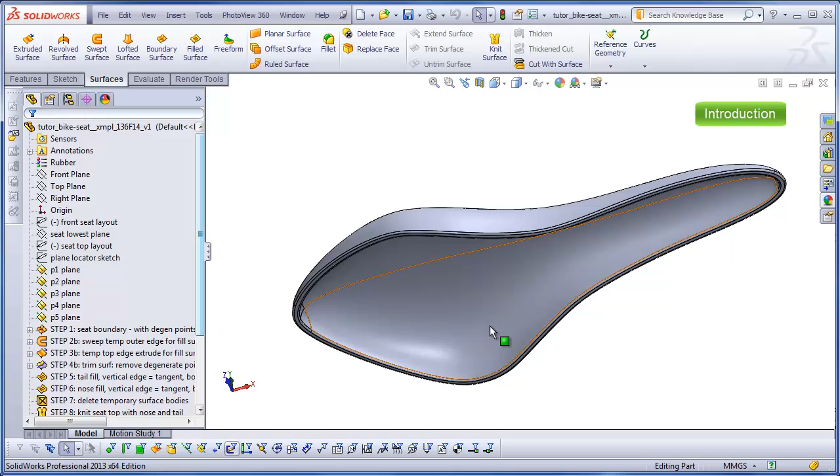This is a tutorial to show how to build a bicycle saddle using surfacing technique. The surfaces will be turned into a solid body, and then the bottom of the saddle or seat will be shelled out.

Last semester we built a similar bicycle seat, but we did it completely with solid modeling because we didn't know how to use surfaces. Because of this, we had to use a few workarounds and compromises to get what we want, because solids do not have the same level of versatility that surfaces do.

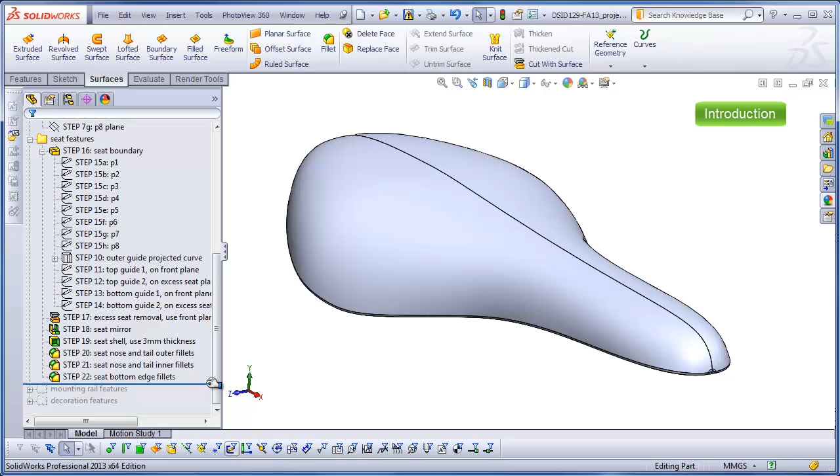Our goal was to build only one half of the seat and then be able to mirror it to the other side and have it join seamlessly together without a ridge or valley along the join. Unfortunately, when modeling in solids using a boundary, it's hard to control the shape of the boundary where it meets our mirror plane, and we weren't able to use a normal to profile control like we would with a surface.

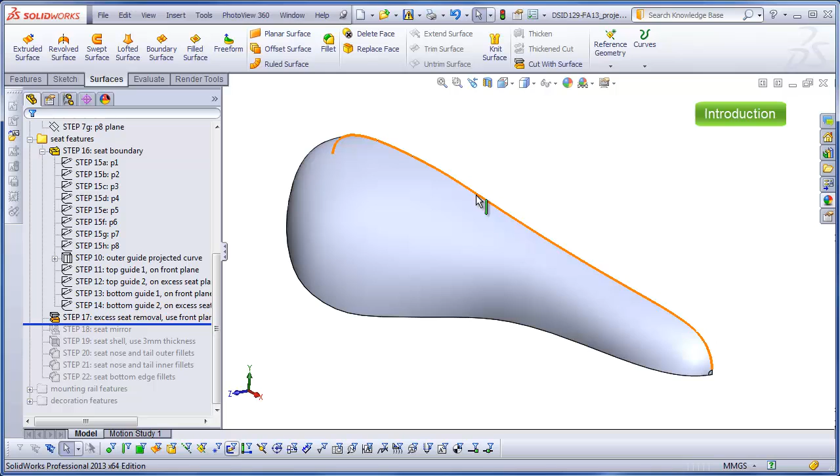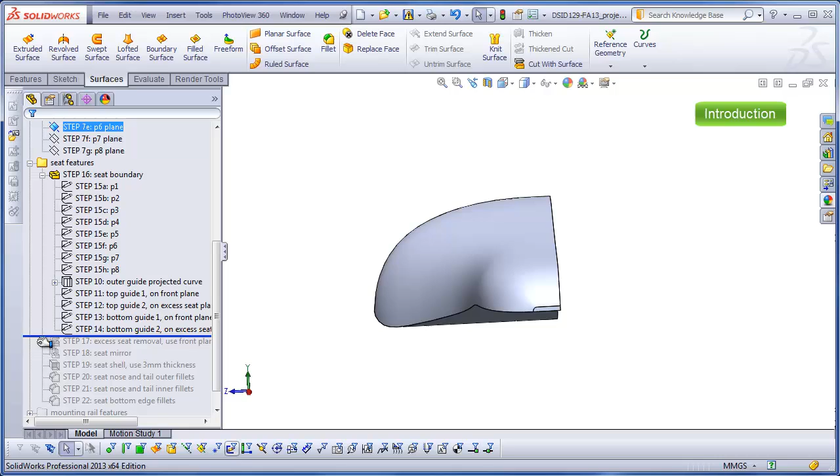To get around this problem, we actually had to build some excess to the boundary, and that allowed us to make the upper face of the boundary normal to the guide curves that were sitting in the mirror plane located here. We were then able to trim off that excess and then finally mirror the seat to the other side.

This was somewhat awkward because every profile of the boundary had to have this excess portion drawn into the profile, and this got to be a bit tedious. In addition to this, it added the potential for making mistakes.

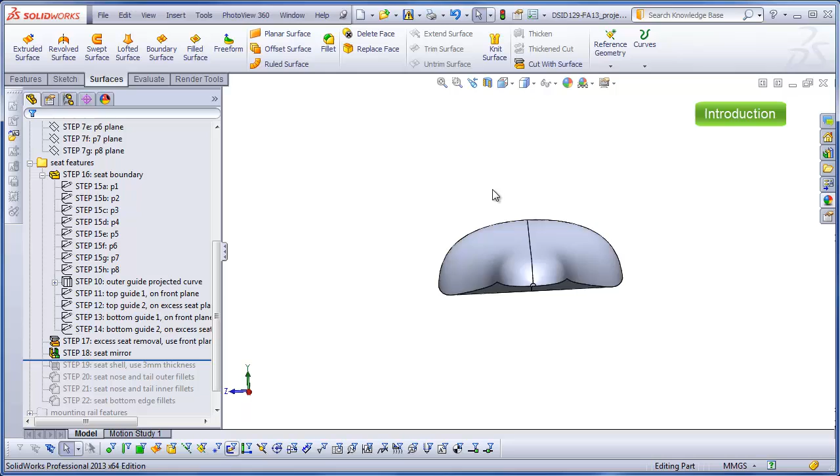Another issue we had to deal with was the fact that the boundary is going from a point at this end to a point at this end. It leaves us with a degenerate point at both ends of the boundary, which makes it very difficult to shell the solid boundary. To get around this problem, what we did was we left a very slight flat at either end of the boundary to get rid of the degenerate point.

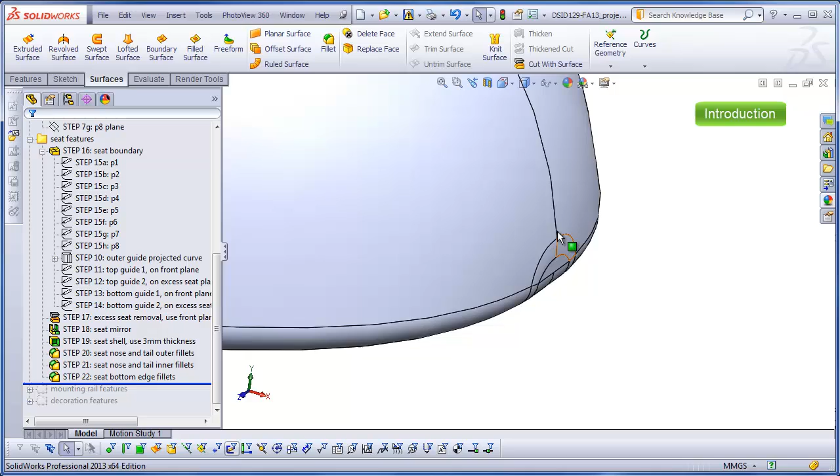Then we tried to obscure that by adding a fillet on the end and then a fillet on the bottom edge and hope that nobody noticed this little compromise that we put in here. With surface modeling, we'll be able to eliminate all these compromises and model exactly what we want.

For this tutorial, we are starting out with a layout of the seat on the front plane and a layout of the seat on the top plane. From these layouts, we are able to make a projected curve, which will be our outer guide curve for the boundary. We then have made a series of planes, and at each of these planes

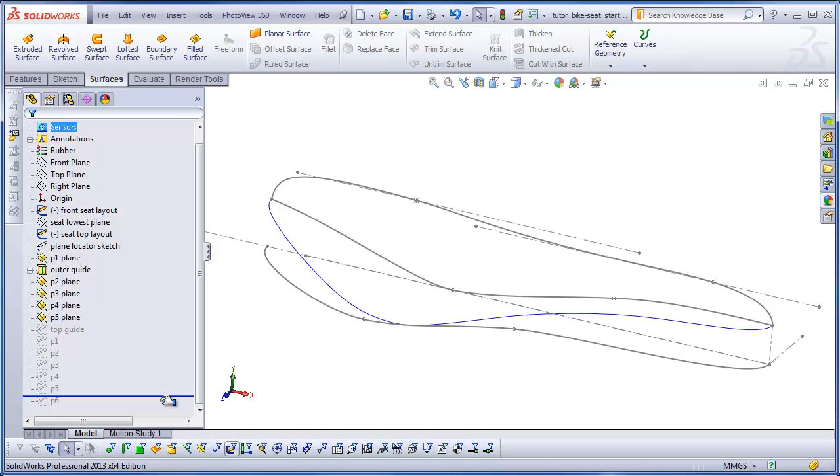is where each profile is drawn. If I hide the layout sketches, we can see now that what we've got is a top guide copied from the front layout sketch, our outer guide curve, which is a projected sketch, and these profiles, which have a Pierce relation to the upper guide and this outer guide. So I've got everything I need to start.

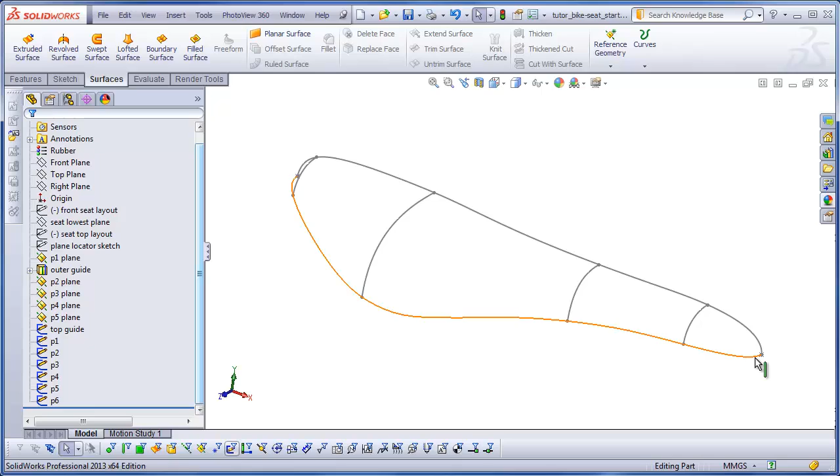The first thing I will do is make the boundary that will go from this end to this end and accept the fact that we'll have a degenerate point at either end. So going to my Surfaces tab and selecting Boundary Surface. For Direction 1, I will select this top guide, which is a sketch on the mirror plane, and this outer guide, which is the projected sketch.

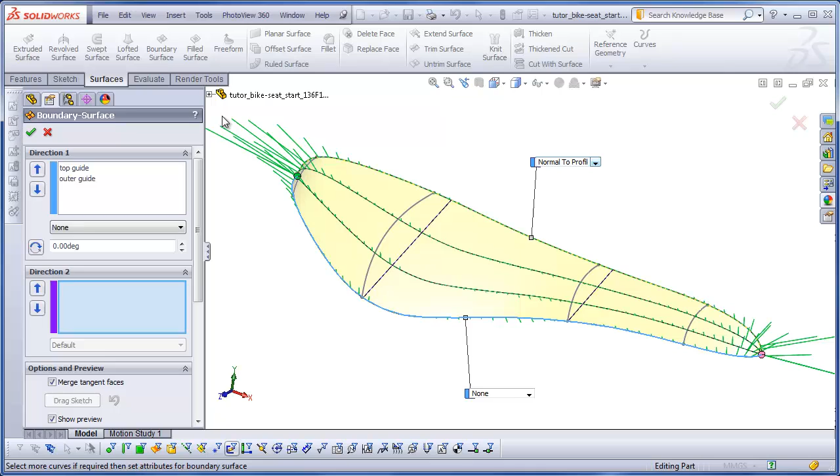I will set this curve on the mirror plane to normal to profile. And for Direction 2, I will select all my profiles in order. I think it might be easier to do that off of my feature tree, so I'll just select those right here.

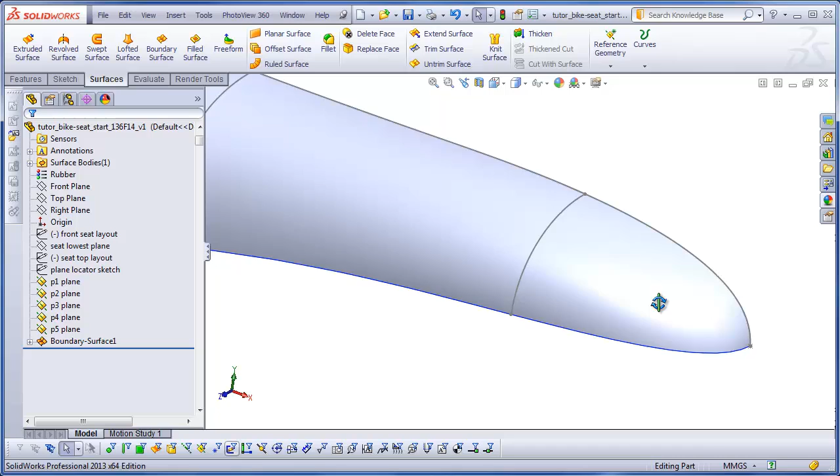And finish. If I look at the end of my boundary and turn on curvature, I can see what the effect of that degenerate point is here, where I've got a little bit of a pinch. That's going to cause us problems if we try to shell this later on. I also can see how curvy this is in this area, and it's flattening out a little bit in this area.

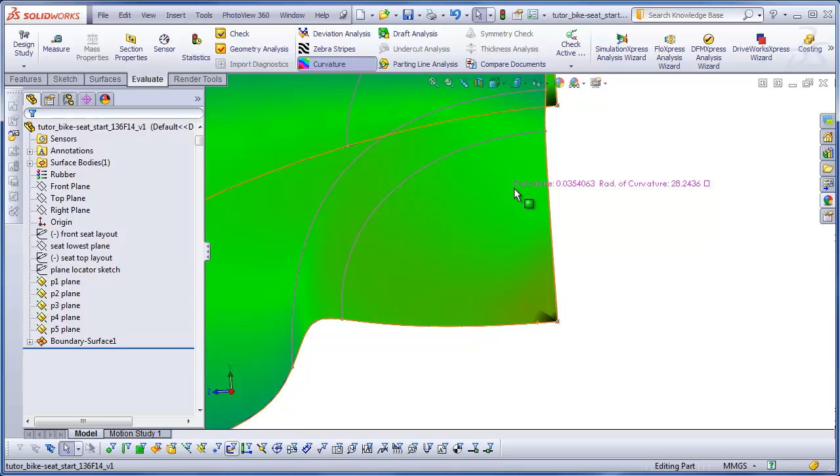So if I go back and edit this boundary, and I go to the top guide, I see that it's set to none, even though I thought I set this to normal to profile. So I'll go back down and set this to normal to profile.

And I also have a control here, which is tangent influence. If I don't want this area here to collapse, because it's a little bit of a good distance from this profile to this end, I can get this to sort of balloon out a little bit more by increasing the tangent influence. So I'm just going to increase that all the way to 100%. This will give this a little bit of a better shape here and not flatten out through this area.

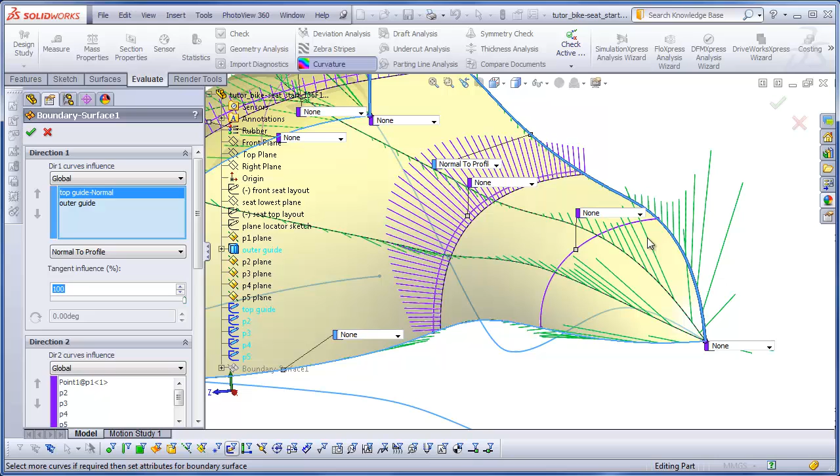So that completes step 1. The next thing I need to do is trim off the ends of the seat where these degenerate points are located, and then patch these back in with a fill surface.

Before I do that, though, I need to preserve the memory of where this original edge is and where this original edge is, so that when I add the fill surface, I can reestablish these two edges that have been removed in the trimmed off area.

This edge is a three-dimensional curve, and I could preserve this edge by simply making a 3D sketch and using convert entities to copy this edge. But that's a little problematic because I only need a little piece of edge here and a little piece of edge back here, and trimming this 3D curve back to this point and this point is usually somewhat difficult and not very reliable. Instead, I'm going to use a different technique.

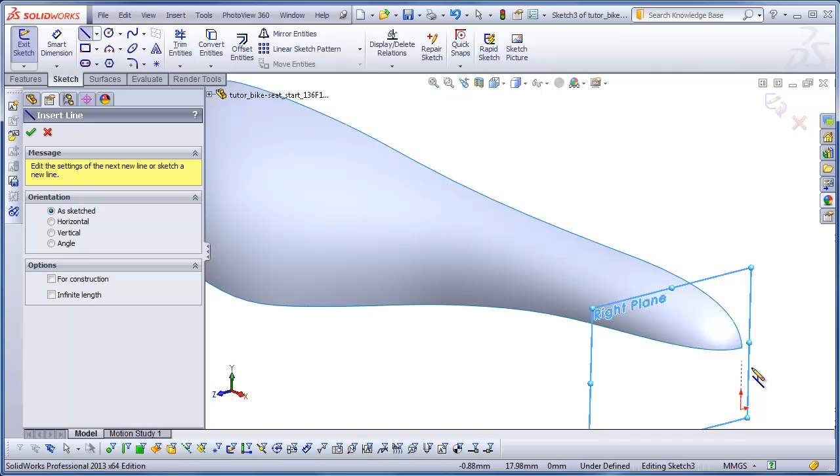On my right plane, I will make a new sketch. Just simply draw a vertical line. The height of the line isn't too important, but I'll just make it 10 millimeters. And I will make sure that there's a pierce relation between this edge and this point. And I will finish that sketch.

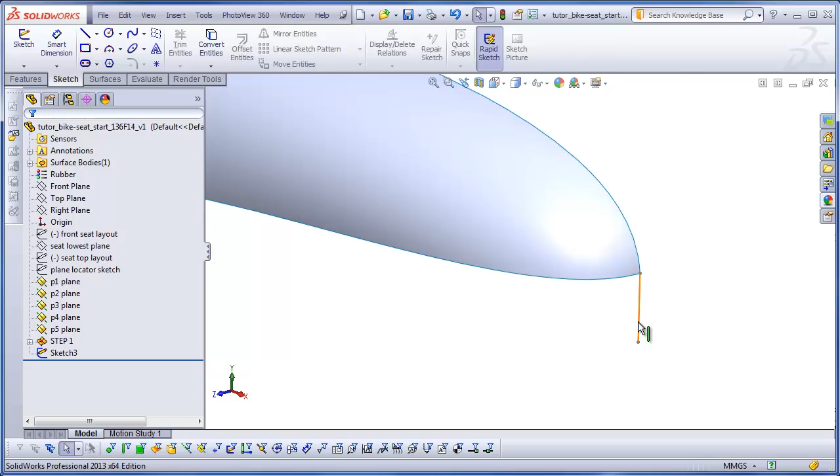Now I'm going to take just this single line and sweep it along this edge here. So going back to Surfaces, Swept Surface, I select this as my profile, and this edge is my path. We take a look at that, we see that this twists around quite a bit.

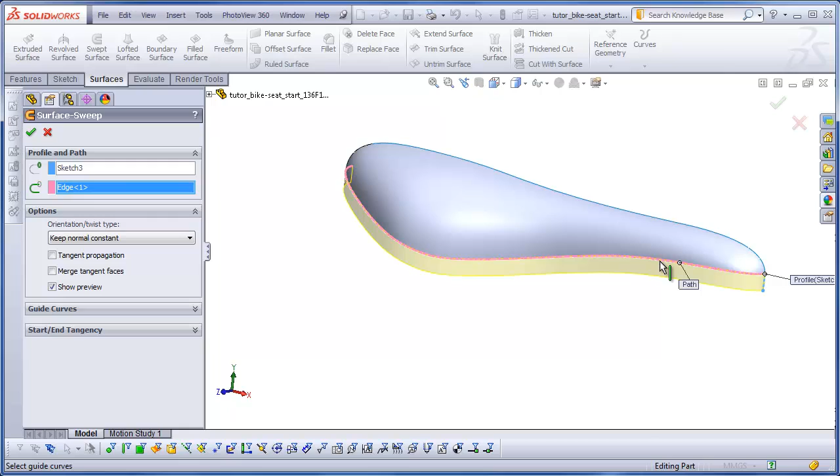Because it's following a path, it's twisting around a lot in 3D space. All we have to do is go to our options and change from follow path to keep normal constant. Now what we have is something that looks like a curtain hanging straight down from this edge. Finish this, and that completes step 2.

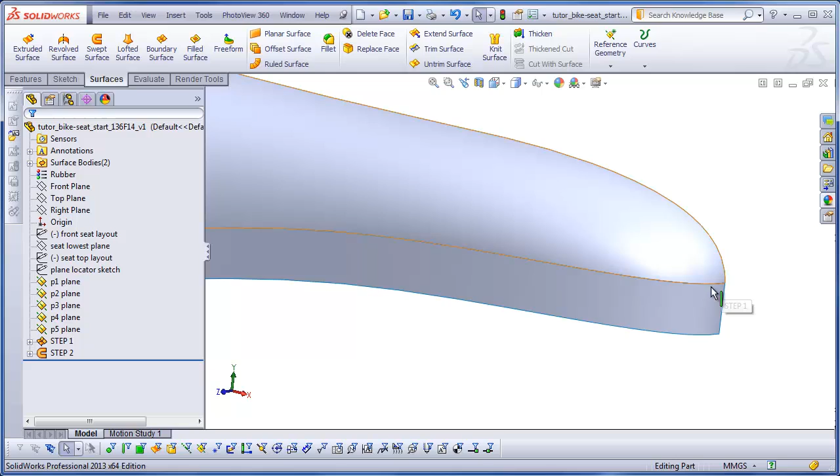The height of this ribbon is unimportant. What is important is that the top edge of the ribbon preserves the memory of this bottom edge of the boundary, so that when we trim away this end of the nose here, we will still have the original location of the edge preserved in this sweep.

We also need to preserve the memory of this edge. In addition to that, we need to have a surface to attach our fill surface to. You'll recall that fill surfaces do not have a normal to profile option. So if we can extrude a surface going in this direction, that will be a convenient surface to attach the fill to and set it to tangent to face.

So all we have to do on our front plane is again make a sketch, click on this edge of the boundary, convert entities, and then go to our surfaces and extrude that. We want the extrusion to go in this direction, and 10 millimeters will be fine. The distance is not important.

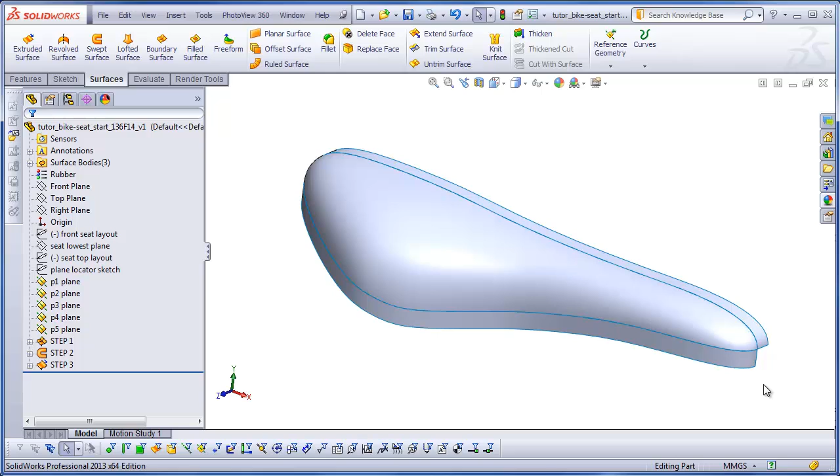Now comes the fun part. We want to trim away the nose and the tail, but also trim this surface and this surface, so just the appropriate portion of edge is left over to make it easy to attach a fill surface.

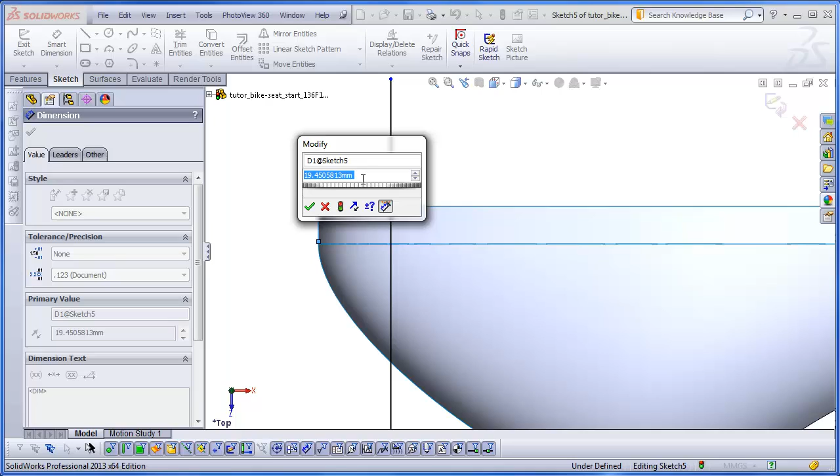Looking at this from the top, on my top plane I will draw a new sketch. Just simply draw a three-sided profile, and I will make it about 4 millimeters from either end. This is to guarantee that I'm going to cut away that degenerate point at either end.

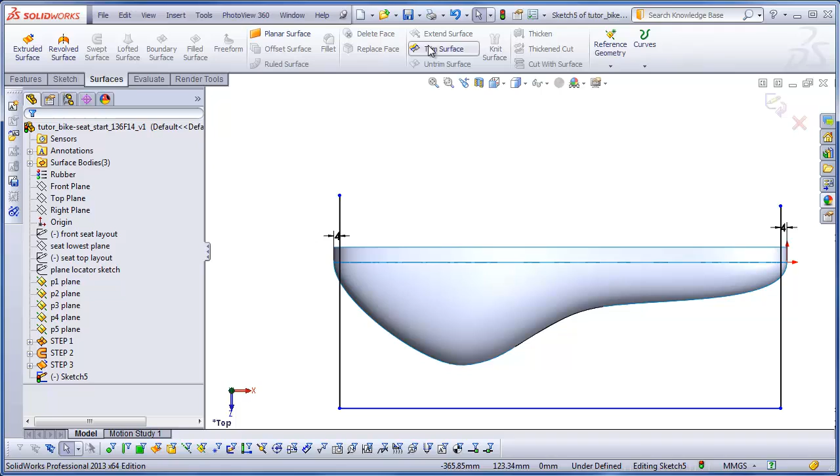And I just want to make sure that this goes well past these surfaces and that this line is well wide of this boundary. So now I can go to my Surfaces tab and select Trim Surface, and make sure that the standard option is selected. It's already selected the sketch that I'm working with as my trim tool, and I can choose Keep Surfaces or Remove Surfaces. I'll leave it at Keep Surfaces.

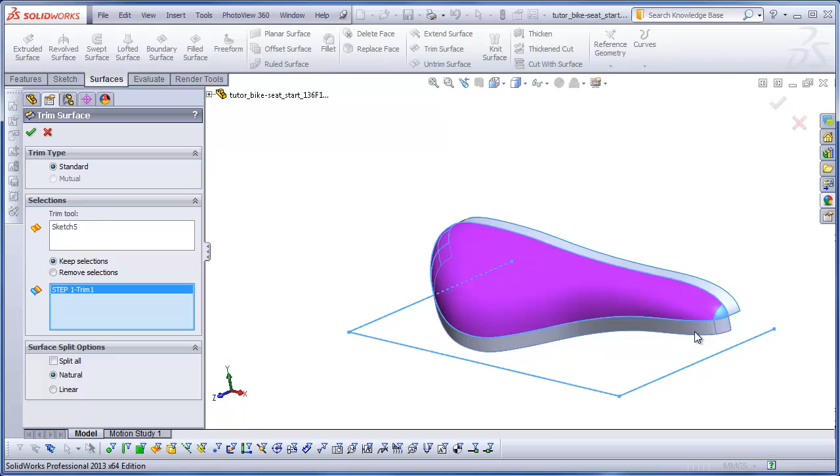What I will do is I want to keep this portion here, and I want to keep this portion here, and this portion here. You see what we are going to have is 3 surfaces coming together at points, leaving this area here open, and we will do the same on the back, keeping this surface here and this surface here.

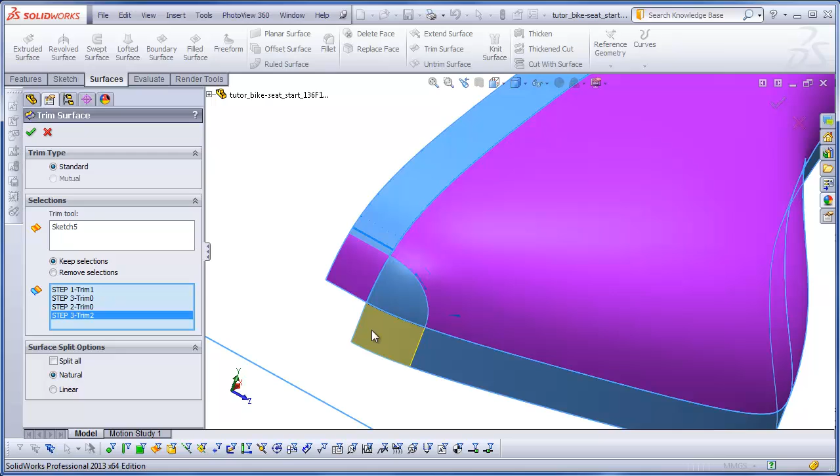Hitting our check mark, we now see that we've got an open portion here, but it's surrounded by 3 edges that will be convenient for a fill surface, and the same thing is happening on this end as well. That completes step number 4.

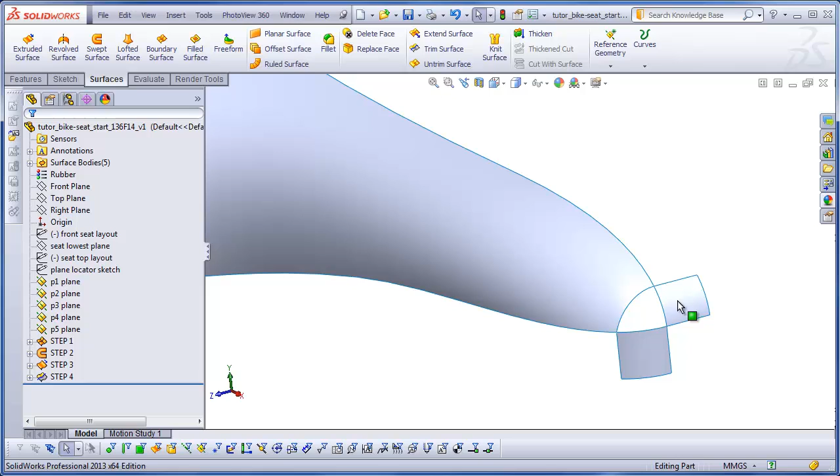Steps 5 and 6 will be to add these fill surfaces to the nose and tail. I will start with the tail. Doesn't matter which one I start with.

Now I go to my filled surface and I just select these three edges. The first edge, which is contacting my boundary, should be set to curvature so that there's a smooth blend back into the original boundary. The second edge, which is along the edge that was preserved by my sweep, can just be left at contact.

And the last edge, which is at my mirror plane, should be set to tangent. The effect here is having a normal to profile control on this edge for the fill, but we don't really have that for a fill, so this is our workaround to attach the fill to a surface which has been extruded normal to our mirror plane.

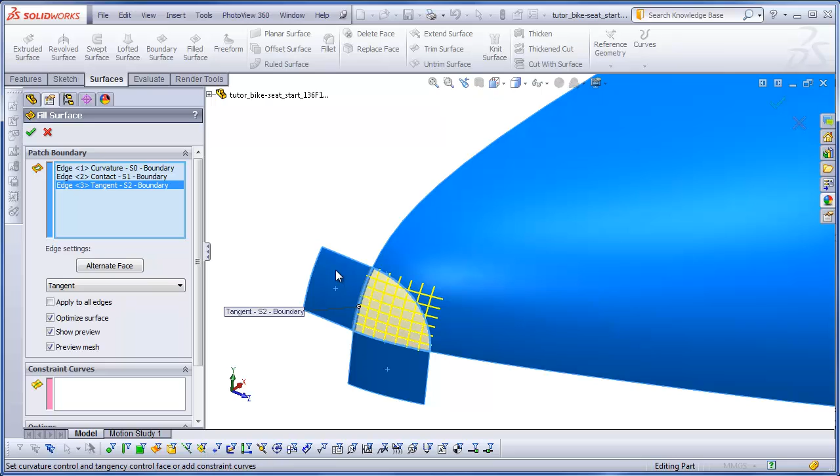So we just finish that, and there's our patched in surface. If we go to our zebra stripes, you see how that smoothly blends in with the original boundary.

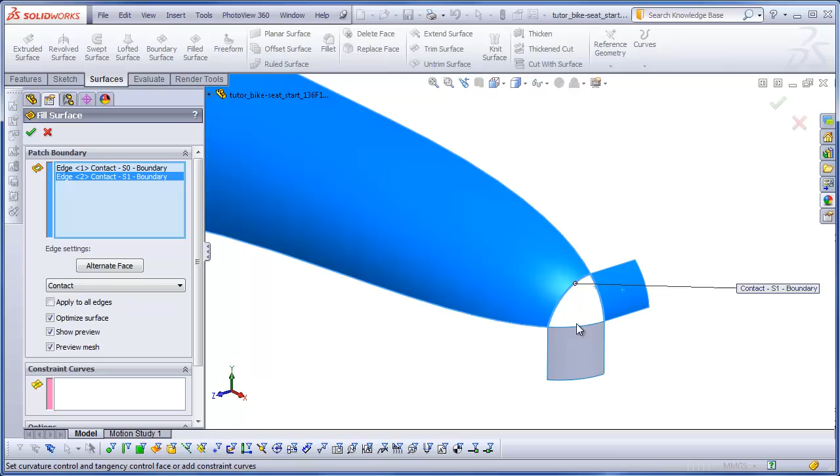Now we can do the same with the nose, the exact same procedure, clicking on these three edges. The first edge we will set to tangent, the second edge we will set to curvature, and the last edge, which is down on the bottom of the seat, we leave at contact. And that completes steps 5 and 6.

So you see how easy it was to make this as a sweep and then use the trim to trim this surface back to this corner. That's a lot easier than trying to copy a 3D edge into a 3D sketch and then trim that 3D curve, which tends to be unreliable. But by using one trim command, we were able to get rid of this piece here and be left with this piece and this piece.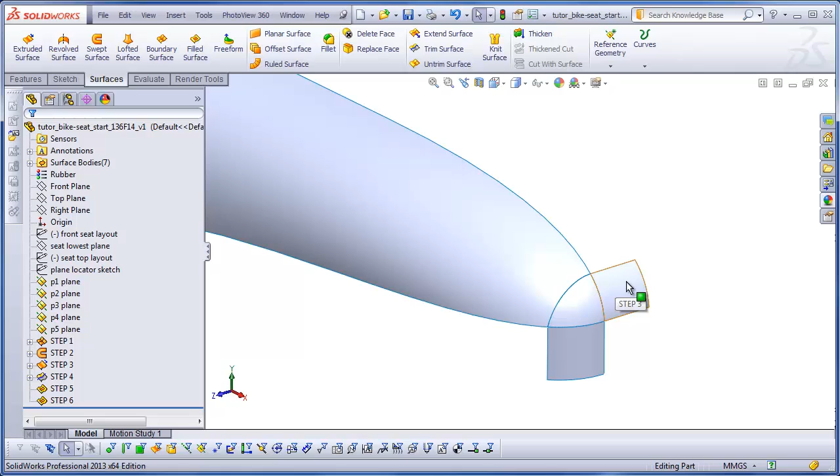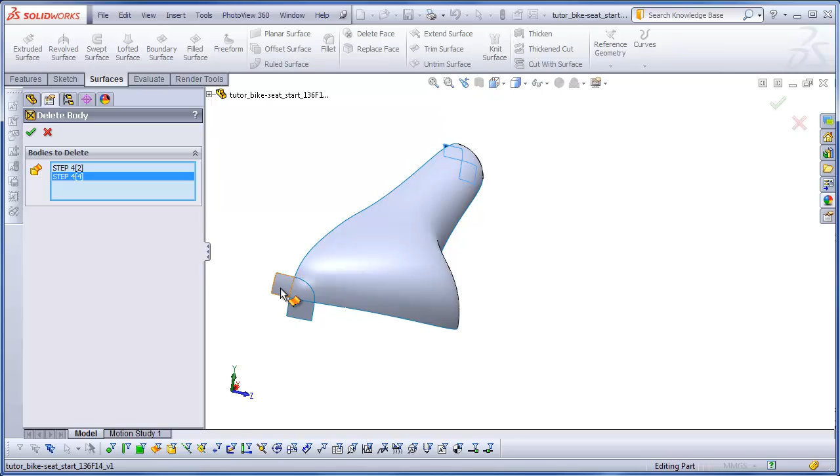Now it's time to do a little housekeeping. We've got 4 temporary surfaces that we don't need. We can go up into Insert, Feature, Delete Body, and we can select the bodies directly on the screen. So we'll select this one, and this one, and this one. And that completes step number 7.

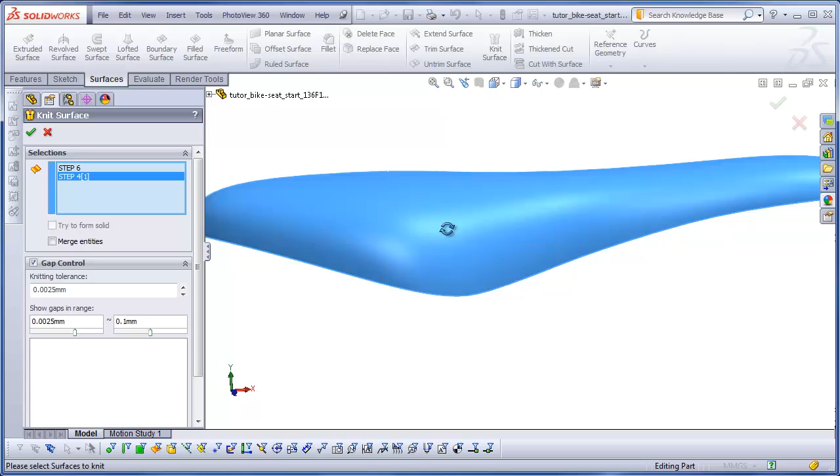Now we see that where the fill surfaces are joining with the boundary, we still have a blue line here instead of a black line. So the next obvious step is to simply knit these surfaces together. So knitting this, this, and this. We now see this line is black, and we have a single surface body in our surface body folder.

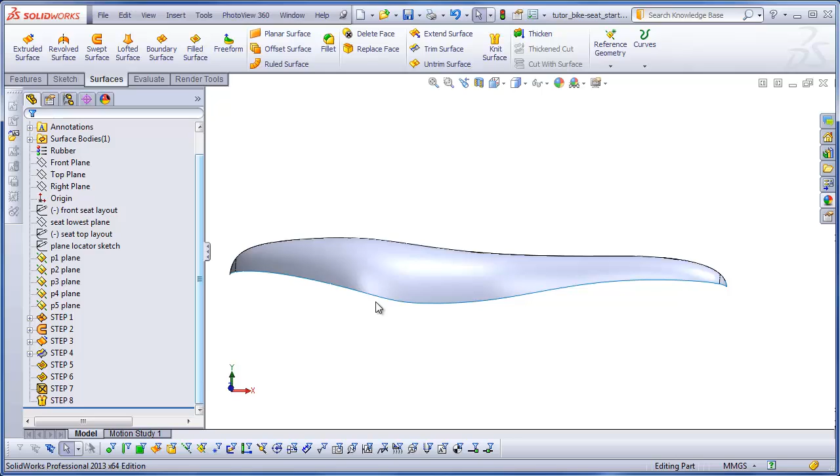That completes step 8. The next series of steps are going to be to turn this into a solid body, which can then be shelled. In order to do this, we need to have a surface on the bottom that will cap off this bottom contour and a surface on the mirror plane. So we'll have a total of 3 surface bodies that we will knit together to form one chunk.

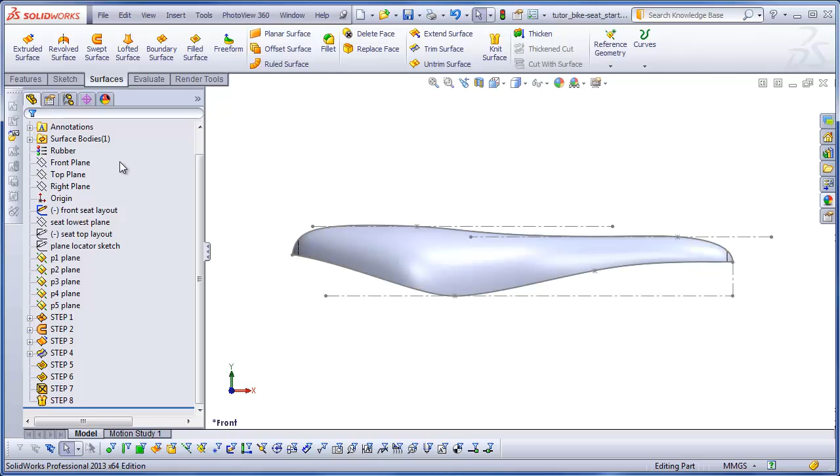We can start with the bottom surface. One way to do this is simply copy these bottom edges into the front plane and then extrude the surface. But because this edge is 3 pieces now, it might be easier to go back to our original layout sketch and copy the bottom contour from the layout. So making my layout sketch visible again, front plane, sketch, and I will just copy this bottom contour, convert entities.

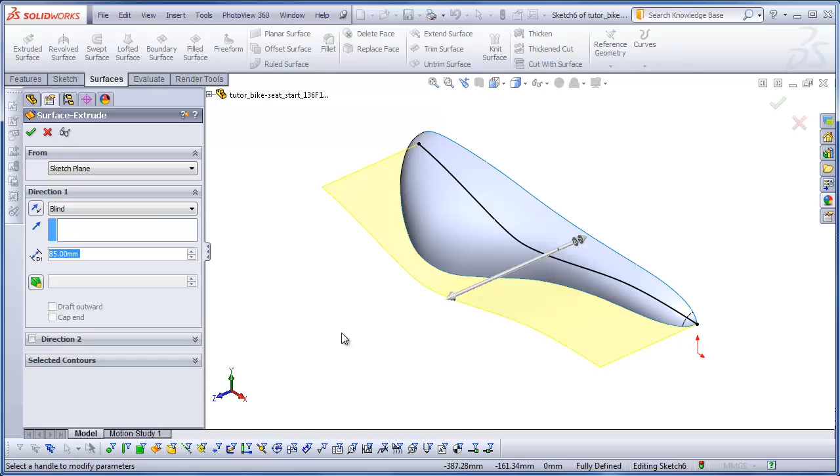And then I can just go back to surfaces and extrude that. And all I have to do is extrude this far enough to make sure that it's well wide of the seat. So that was step 9.

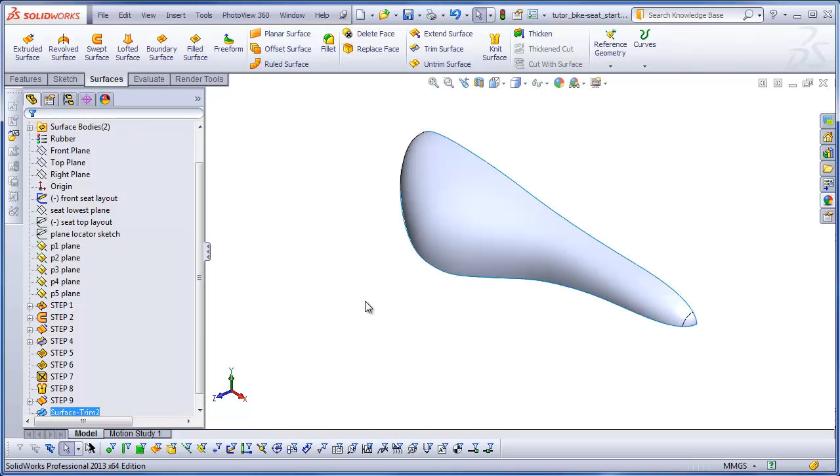Now selecting Trim Surface, I can select my upper boundary as my trim tool. And I will now select Remove Selections and hover over this outer area that I want to get rid of. That trims away the excess, leaving me with a nice smooth curved bottom.

The last thing to do is fill in a planar area that will cap off the seat on the mirror plane. That was step 10 we just completed incidentally.

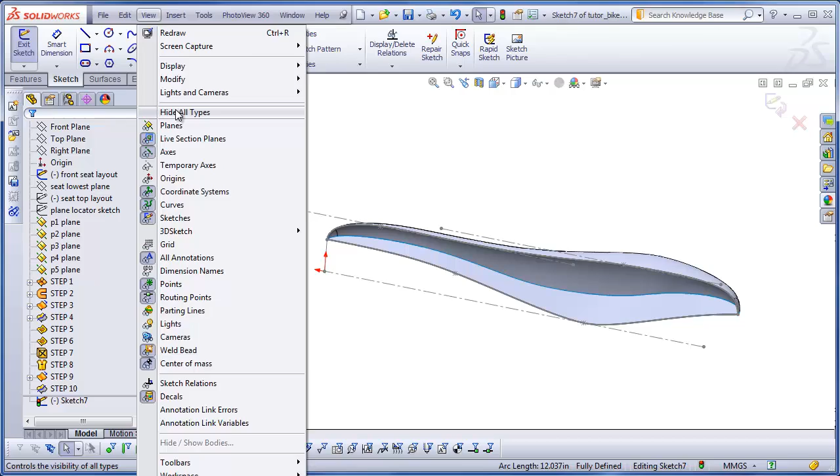So to make this surface on the mirror plane, once again what I will do is make a sketch on the front plane, turn my sketches back on, and I will simply copy the upper and lower contour from my layout sketch. So clicking on this edge here, convert entities. This edge here, convert entities. Let me hide sketches so you can see that. And here we have the upper and lower contour. Go back to surfaces and select planar surface.

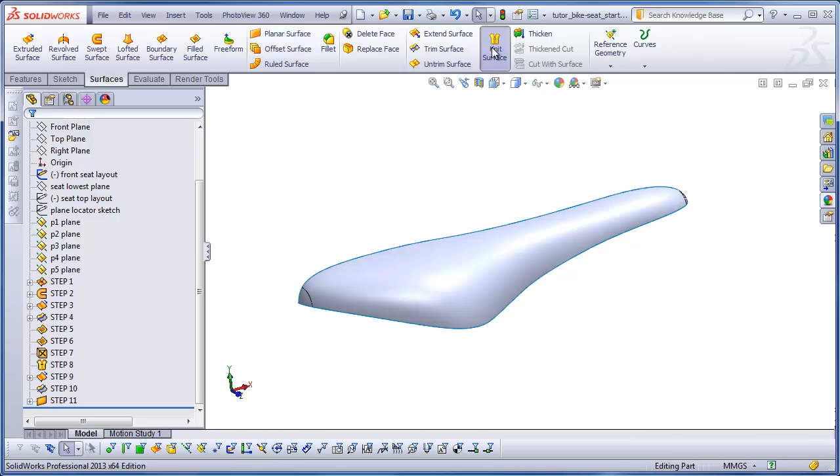That was step 11. Now I've got 3 surface bodies completely enclosing a volume. I can go back to Knit Surface and click on each of these bodies. When I do that, the Try to Form Solid option becomes visible. I check this, hit the green check mark, and it knits these together while turning this into a solid body. Looking at the top, the solid bodies folder is here now, but not the surface bodies folder.

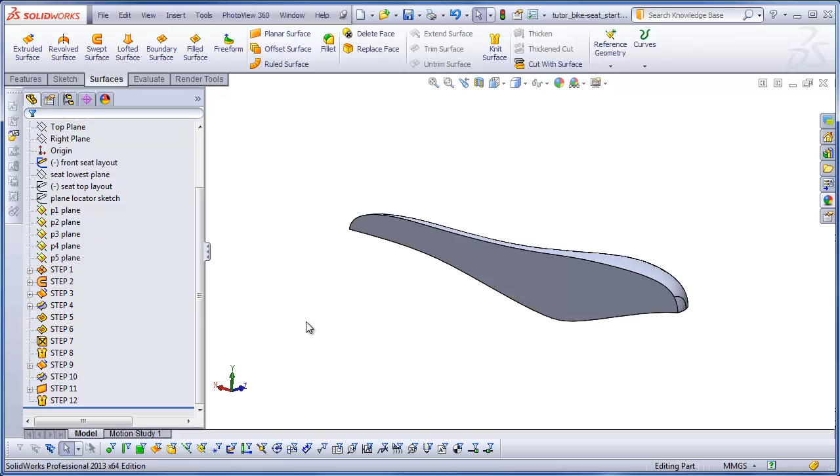That was step 12. I'm now ready to mirror this solid body, so going to Features, Mirror. My front plane is my mirror plane, my body is this entire solid body, and I want to make sure Merge Solids is checked.

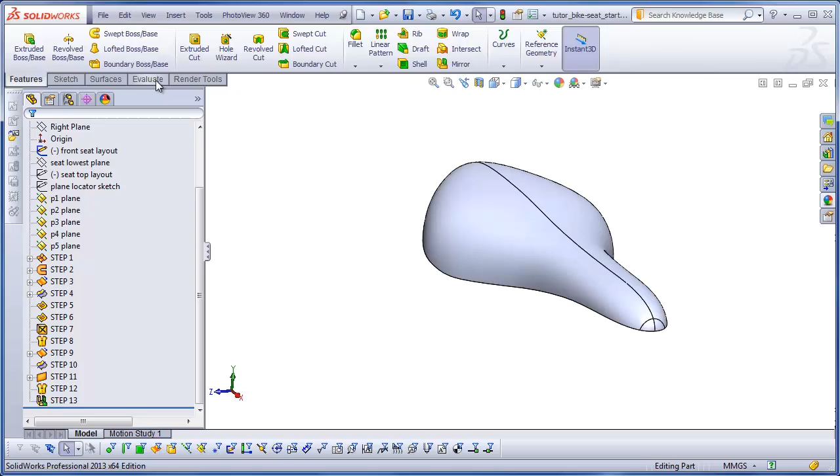That completes step 13. Now, if we've done this right, we can go to the Evaluate tab, click on Zebra Stripes, and see how the fill surfaces are blending nicely with the boundary surfaces, and the mirrored surfaces are blending nicely with the original surfaces.

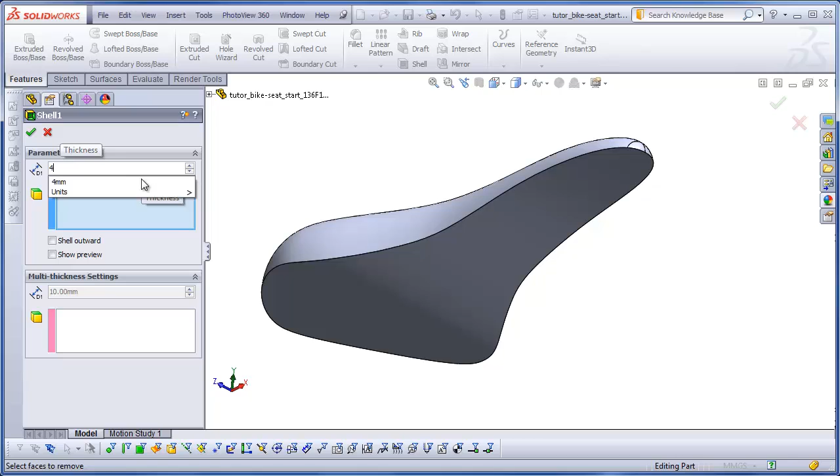Now we're in the home stretch. All we have to do is shell this. We have a nice bottom surface for doing that without any artifacts or split lines. So we go back to Features, Shell. I'll set this to 4 millimeters and click on this surface here. We see this shells nicely without anything weird going on inside. You can see the shelled portion of the fill surface, both at the tail and at the nose.

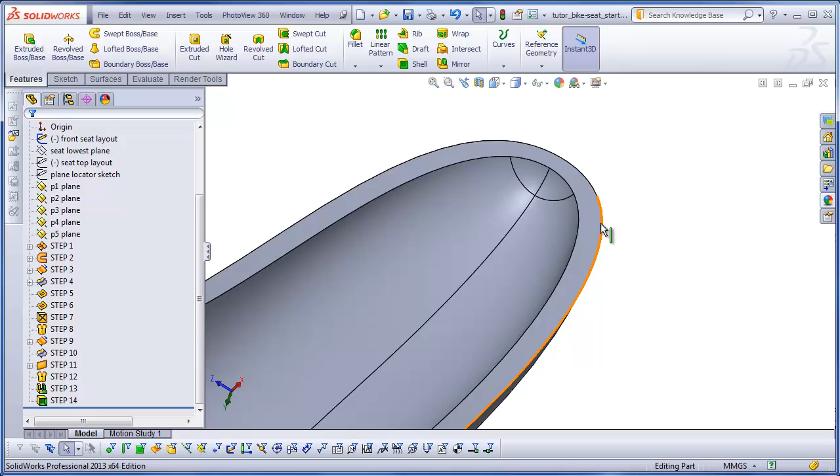That was step 14, and our final step is to add a fillet on both the outer edge and the inner edge. We'll make that 1 millimeter. The easy way is to just set that to 1 millimeter. Instead of clicking on the edges, we can click on this entire face, and that should fillet both the inner and outer edge at the same time.

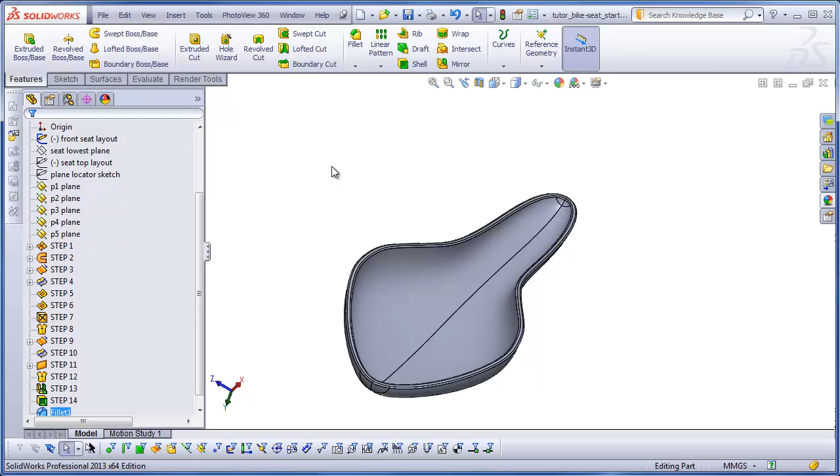So now we have a nice completed seat that has no compromises like a small flat on the end. We have a very good shell on the inside without any weird surface artifacts like you might have had when you did this with solids. It took a few extra steps to do it this way, but each step was easy, and I think less fraught with error than all the workarounds we had to do building the solid version.

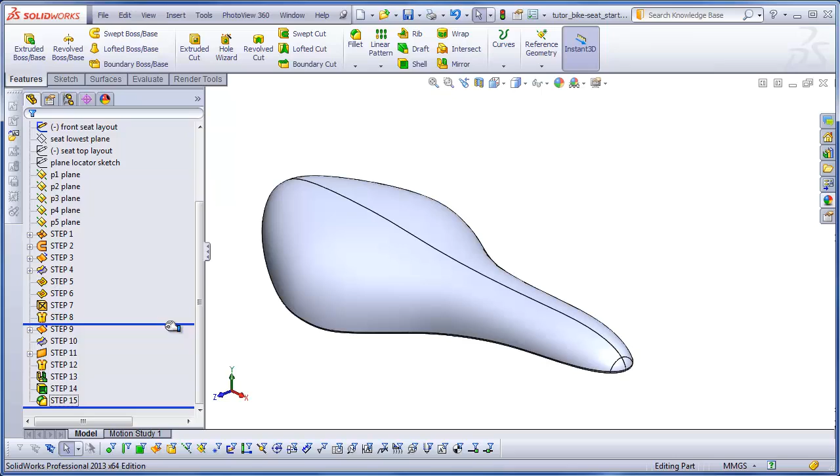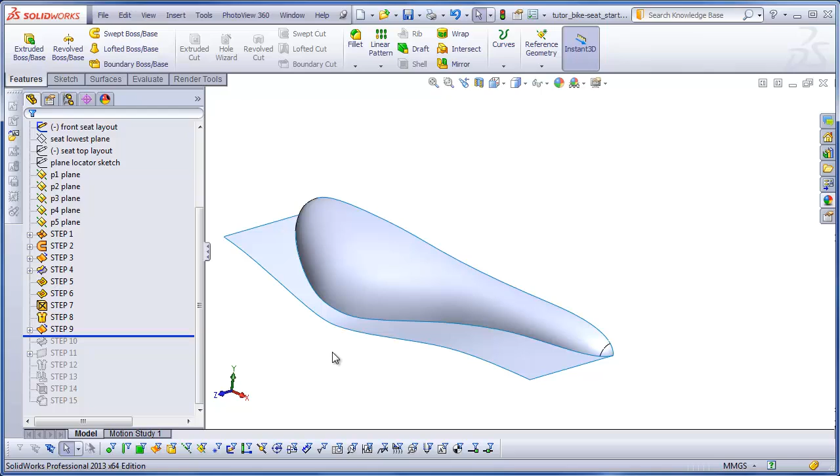I'll mention there was one other way we could have knitted together all the surfaces to create the solid. I'll roll this back to show how to do that. Right after we knitted together the boundary and fill surfaces, we made the extruded surface that would represent the bottom face of the seat, then trimmed away this excess material. I think there's a way to avoid doing that trim and also to do the planar surface on the mirror plane. So we'll start here with this knitted boundary and fill, and this extruded bottom surface.

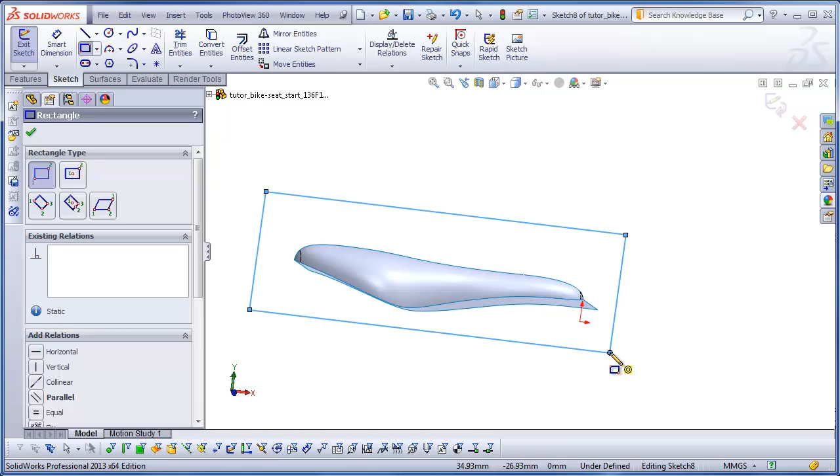On the mirror plane, what we'll do is not even bother trying to make a planar surface that perfectly matches the shape of the seat. I'll just draw an arbitrary rectangle out here and make that the planar surface, which is obviously way too big.

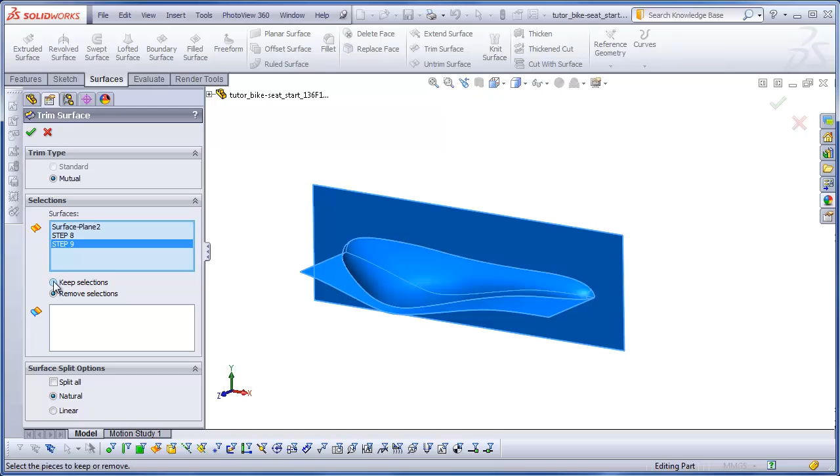Now what we do is go to our Trim, and this time use the Mutual option. We'll select all 3 of these surface bodies, then select Keep Selections, highlight this box, and click on the pieces I want to keep. Hitting the check mark, you see that trims everything back to just forming the enclosed seat, and at the same time it's knitting all the surfaces together.

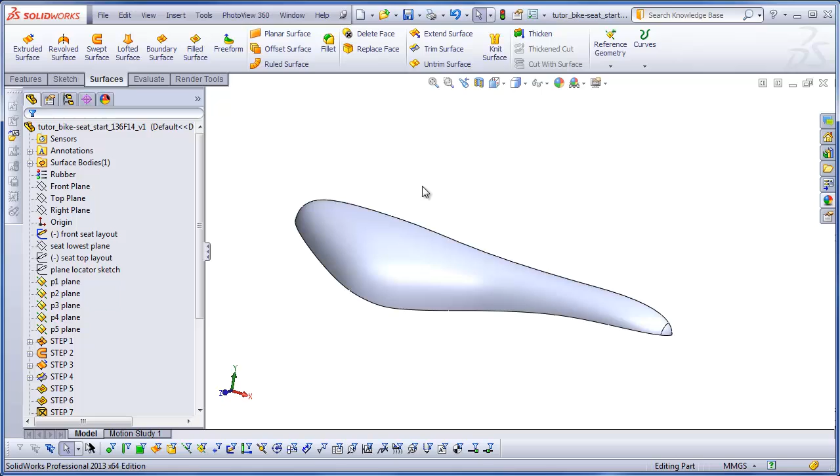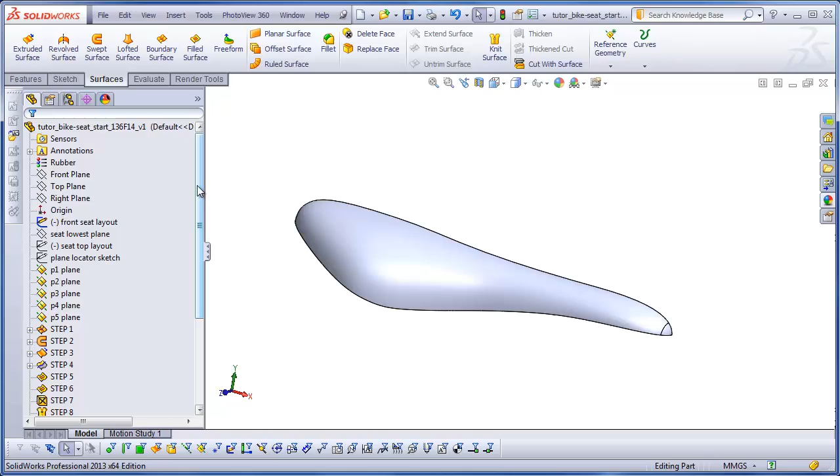Now this is still a surface body, hollow inside, so to turn it into a solid body I go to my Thicken command, and there's an option here, Create Solid from Enclosed Volume. I check that, hit the check mark, and now this should be a solid body. We see here that the Surface Bodies folder has disappeared from the top of the feature tree.

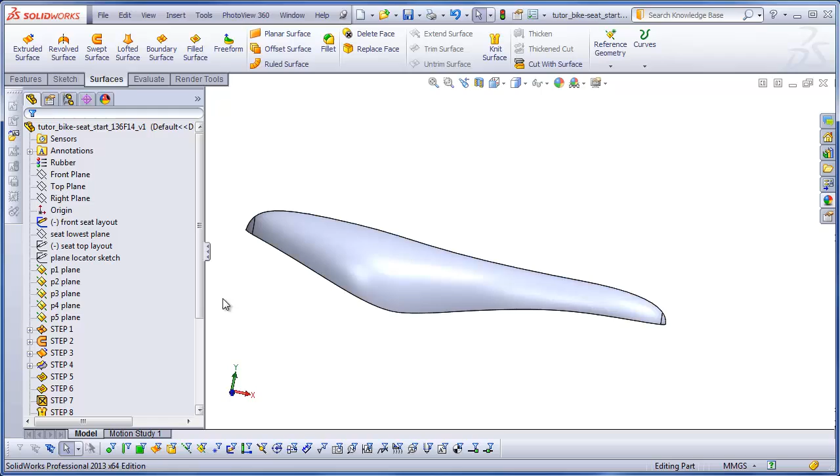Both methods take the same number of steps, so it's up to you which is more appealing. The one advantage of this method is that when you build a planar surface on the mirror plane, you don't have to bother perfectly matching the contour of the seat. As you saw, I just drew an arbitrary rectangular surface, and that was automatically trimmed when we used the mutual trim command. That completes this tutorial.